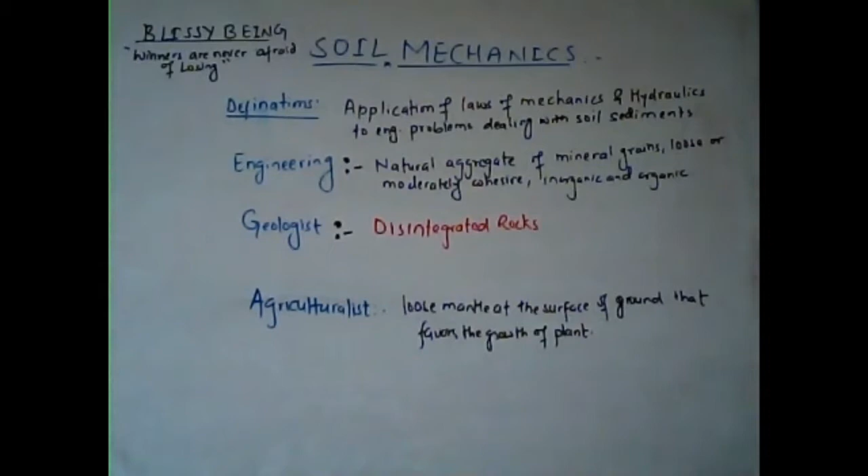This is the very basic and simple way you can classify soil. The mechanism in which soil is formed, the basic phenomenon in which the soil process takes place for its formation, is weathering.

At first, weathering takes place due to various agencies. The soil or rock is disintegrated due to weathering, and then the weathered soil is transported.

First weathering, then the weathered soil is transported and deposited at a certain place, and after deposition the soil is upheaved. Certain agencies change the to-and-fro movement of the soil, which is the upheaval. So for soil forming mechanisms, you have weathering, transportation, deposition, and upheaval. WTDU is the basic formation of soil.

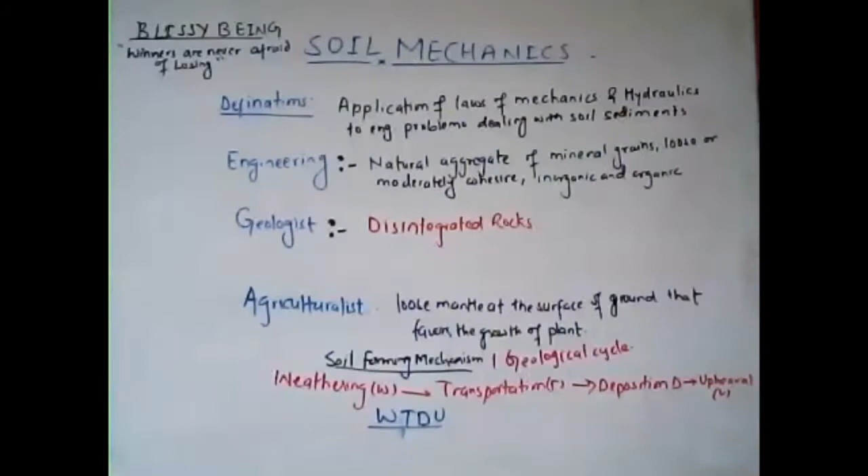Before moving forward into the three-phase diagram of soil, we need to know some basic terms that you may encounter in soil mechanics. First, soil transported by wind.

The soil transported by wind is aeolian soil; examples of aeolian soil are loess. And soil transported by running water is also alluvial soil.

Soil deposited at the bottom of a lake is lacustrine soil. Soil transported by gravitational force is colluvial soil, also known as talus.

Soil formed by glaciers or ice melting is glacier soil, also known as glacial drift. These terms may be useful for your competitive exams as well, so you must remember all these terms.

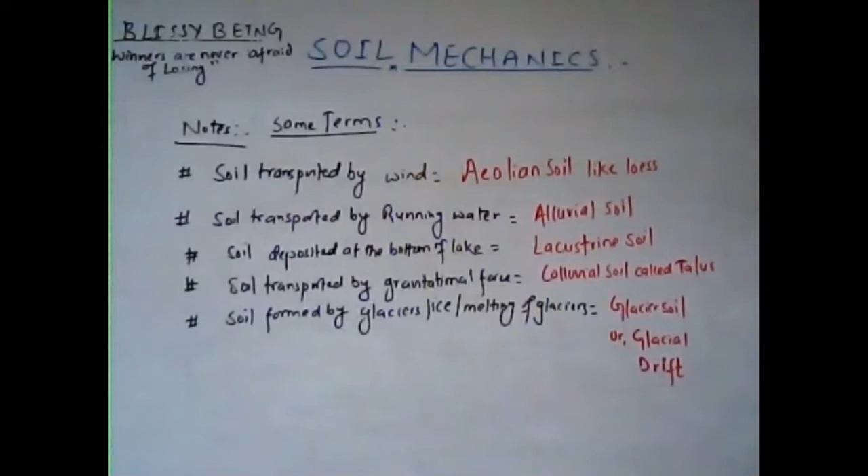Now friends, we will go through the different properties of fine-grained soil. Fine-grained soil possesses different properties like plasticity, thixotropy, consolidation, and swelling. These are the various properties of fine-grained soil.

We will briefly discuss what plasticity is. This topic will come in later lectures, in which we need to determine the plastic limit and liquid limit by the Atterberg limits or consistency limits.

For a quick overview, we are just mentioning all these things. Plasticity is the property of soil by which it undergoes deformation without cracking or fracturing. So soil just deforms without possessing any sorts of cracks or fractures.

In plasticity we have two limits, the plastic limit and liquid limit. Plastic limit is the minimum water content at which the soil will just begin to crumble when rolled into a thread approximately 3 mm in diameter. So when you roll the soil into a very thin thread, it just crumbles at that minimum amount of water, and that minimum water content is the plastic limit.

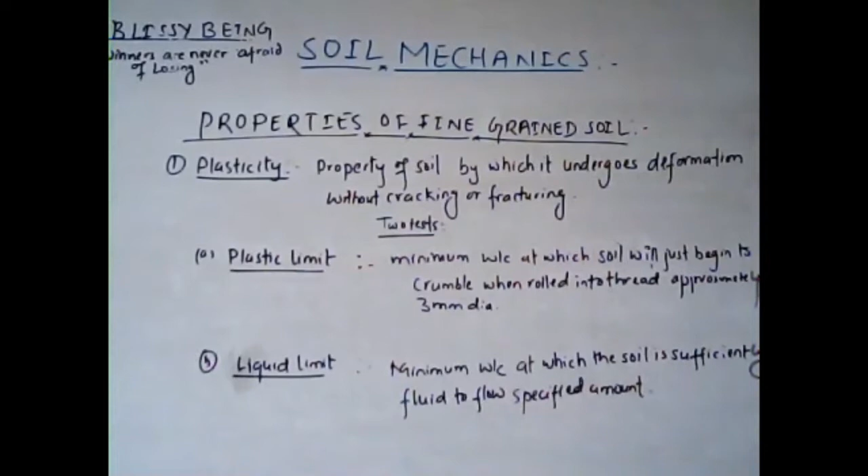Now friends, the second property of fine-grained soil is cohesion and thixotropy. Cohesion is the capacity of the soil for resisting shearing stress. Since shearing stresses occur in the soil, the resistance capacity developed by the soil against that is called cohesion.

Thixotropy: whenever sensitive clays are used in construction, they lose strength due to remolding during the construction operation. With the passage of time, the strength again increases, though not to the same original level. This strength loss or gain with no change in the volume or water content of the soil is called thixotropy.

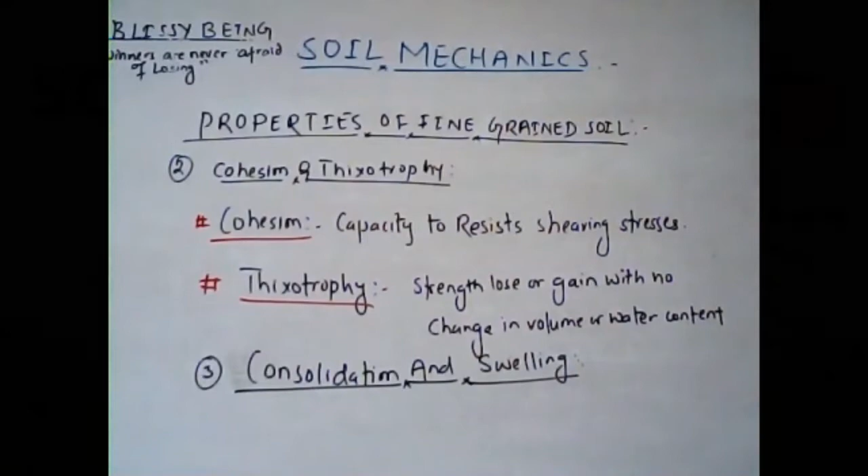The third property of fine-grained soil is consolidation and swelling. In consolidation, the volume of the soil is reduced, while in swelling, the volume of the soil is increased.

Now friends, we have moved to the three-phase system of soil. This is a very important topic of soil mechanics, and these basic terms are used throughout the entire syllabus. If you carefully understand these terms, the entire soil mechanics subject will become much easier for you. Soil consists of three phases: the solid phase, the water phase, and the air phase.

We have represented on the right-hand side the solid phase, water phase, and air phase. On the left-hand side is the volume section, where the volume of solid is Vs, the volume of water is Vw, and the volume of air is Va. If you sum the volume of air and water, you get the volume of voids, Vv. Adding all three volumes gives the total volume of soil.

Now we will be focusing on the various relationships between the different parameters associated with soil mechanics.

Now we will go through the technical terms used in soil mechanics, and first we will discuss water content, W. This water content is the amount of water present in a certain weight of solid.

Mathematically, water content is denoted by weight of water Ww divided by weight of solid Ws, into 100%. From the phase diagram, weight of water can be written as total weight minus Ws. So solving this, water content W equals W by Ws minus 1, into 100%. In terms of mass, you can write this expression as well.

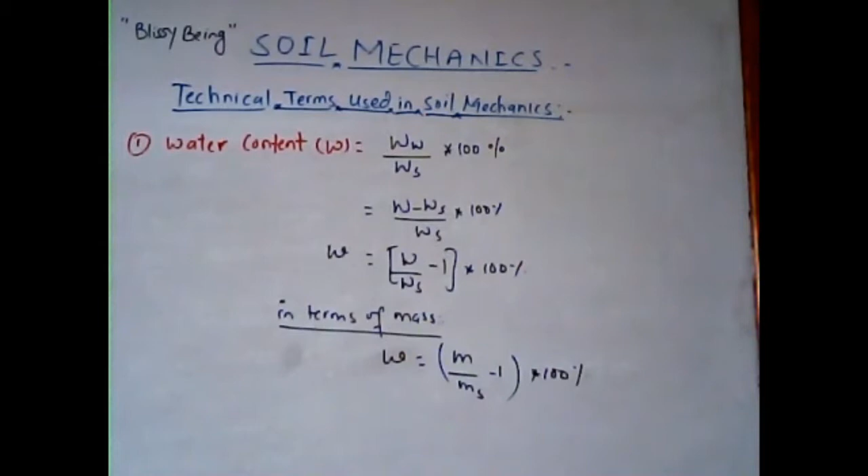Now, second technical term is the density of soil. The soil cannot remain in the same condition in all places. Sometimes it may be moist, sometimes dry, sometimes solid, sometimes saturated, and sometimes submerged, meaning entirely covered with water. In such cases, we have different densities.

The first type of density of soil is the bulk density or moist density. It is denoted by rho, and is the ratio of total mass of soil to the total volume of the soil. Its unit is kg per cubic meter.

The dry density rho d is the mass of solid to the total volume of soil. The density of solid, rho s, is the mass of solid divided by the volume of solid, that is, ms by Vs.

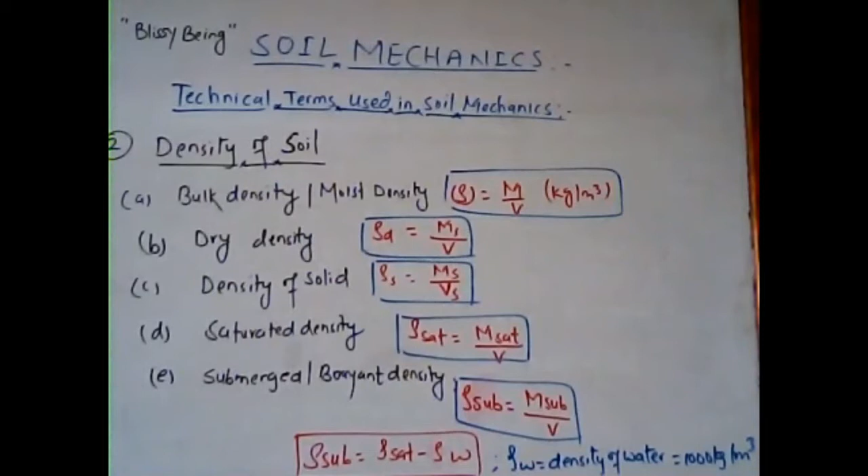Now, the third technical term used frequently in soil mechanics is the unit weight of soil mass. If you replace mass with weight in the density expressions, the resulting quantity is known as the unit weight.

The unit weight of soil also has different terms based on soil condition. First is the bulk unit weight or moist unit weight, gamma, which is the weight of soil to the volume of soil.

Second is the dry unit weight, gamma d, equal to the weight of solid to the volume of soil. Third is the unit weight of solid, which is the weight of solid by the volume of the solid.

Fourth is the saturated unit weight, gamma sat, the ratio of weight of saturated soil to the total volume of soil. Fifth is the submerged unit weight, gamma submerged, equal to the weight of submerged soil to the total volume of soil. The submerged unit weight can also be expressed as the unit weight of saturated soil minus the unit weight of water.

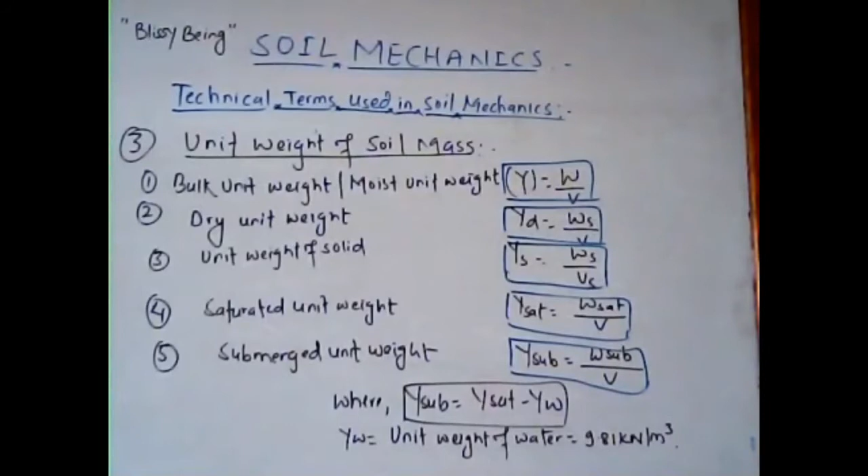Gamma w is the unit weight of water, taken as 9.81 kilonewton per cubic meter. These are very important technical terms used in soil mechanics, and understanding them will make it much easier to read the other chapters.

The fourth technical term is the specific gravity of the soil solids, G. It is the ratio of the unit weight of soil solids to the unit weight of water. If you know the specific gravity of any soil solid, you can easily find out the unit weight of that soil solid by multiplying the specific gravity with the unit weight of water, which is already known as 9.81 kilonewton per cubic meter.

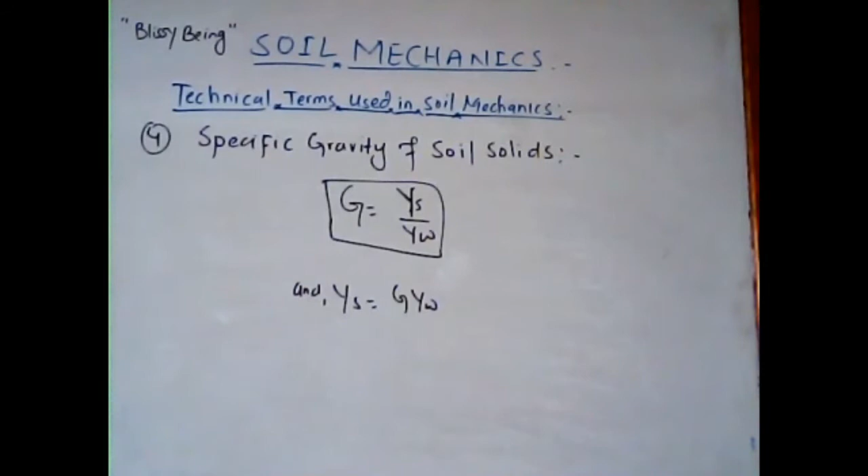The specific gravity of soil solid is the ratio of unit weight of soil solid by the unit weight of water. Now the fifth technical term used in soil mechanics is the void ratio, E. This void ratio is the ratio of the volume of void to the volume of solid - how much volume of void is present in the volume of solid is the void ratio, represented by E.

The sixth technical term is porosity, eta, that is the ratio of volume of void to the total volume. I have seen that many students get confused with these formulas - sometimes we use volume of void, sometimes volume of solid, sometimes total volume V. There is always confusion among students about which formula to use. If you remember the void ratio trick, you will always remember porosity. Always remember void ratio as volume of void to the volume of solid. For short remembering, you can use the 'VS Niketan' formula.

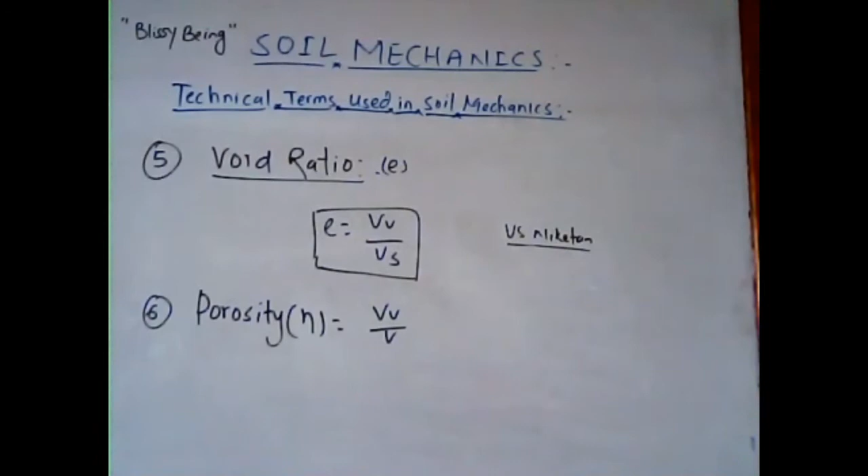V is the void, S is the solid. So in the void ratio, you have volume of void to the volume of solid. Now the seventh technical term is the degree of saturation, S. This degree of saturation is the ratio of volume of water to the volume of void - how much water is present in the volume of void.

Always remember that saturation is a word always related with water, so in the saturation formula there will always be the volume of water, because for saturation there needs to be water filled in the soil. Degree of saturation S is what volume of water is present in a certain volume of void. For fully saturated soil, all void is replaced with water - if you substitute the volume of void with the volume of water, VW, you get the degree of saturation S equals 1.

Likewise, for dry soil, the degree of saturation will be 0 because the volume of water in the dry soil case will be 0, and consequently the degree of saturation will be 0 for dry soil. This may sometimes be asked in your competitive exams.

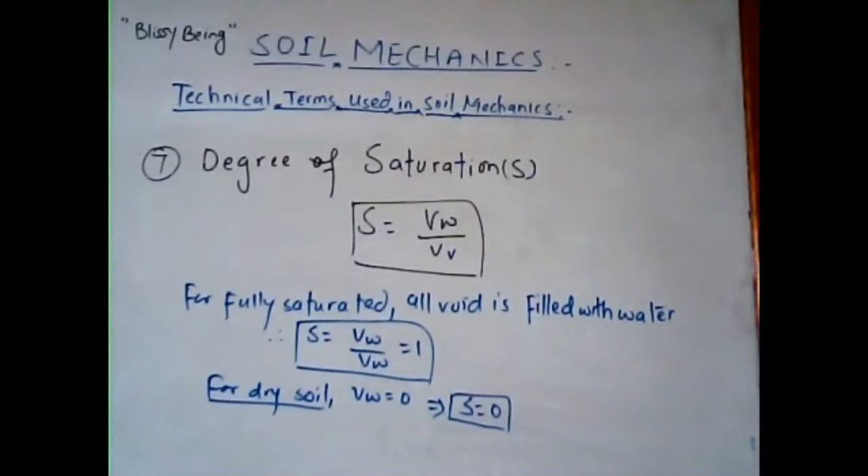Now the eighth technical term is the percentage air void, eta A. Eta A is the ratio of the volume of air to the total volume of soil, into 100%, which gives the percentage air void. Likewise, the next technical term is the air content, AC, which is the ratio of the volume of air to the volume of void.

Sometimes there may be confusion between these two formulas. Among these two formulas, we need to remember one so that we can remember the other automatically. If you try to learn both formulas separately, there is a chance you may mix them up. So you need to remember one formula and relate it to the other so you can easily correlate the difference between them.

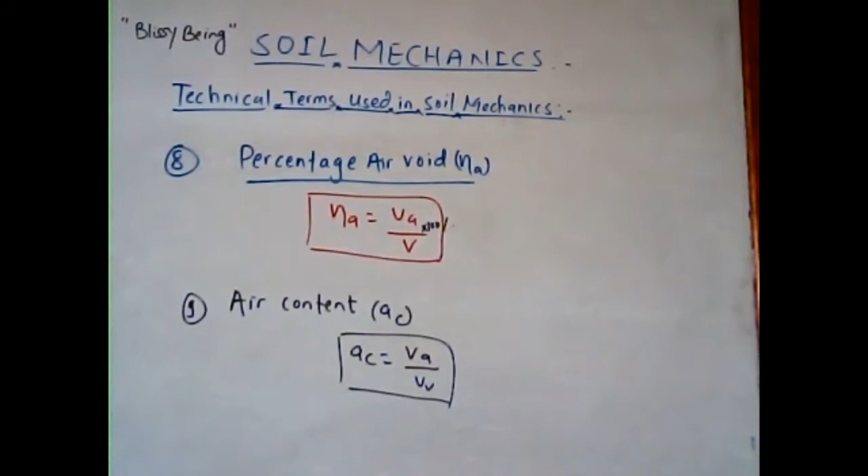Now friends, we can relate the air content with the degree of saturation. We know that the volume of void Vv equals to Va plus Vw, so Va will be Vv minus Vw. If you substitute the value of Va as Vv minus Vw, then you can easily obtain air content as 1 minus S. This is the important expression in which the air content AC is related with the degree of saturation. So whenever you have given the air content, you can easily convert it into the degree of saturation.

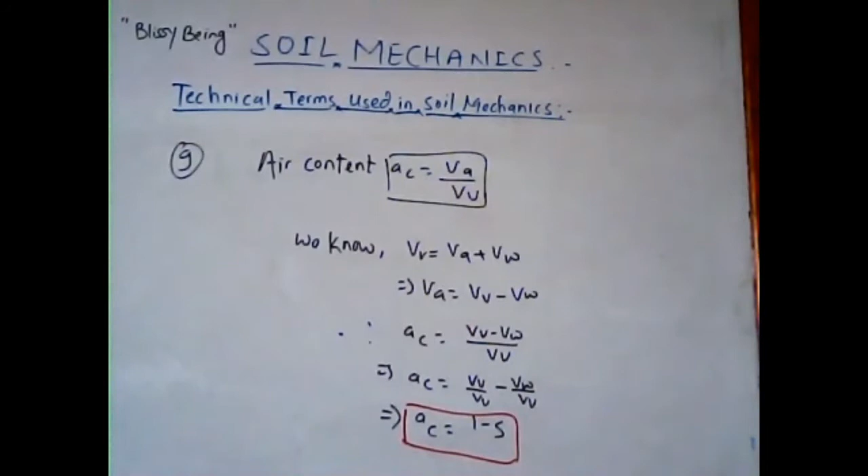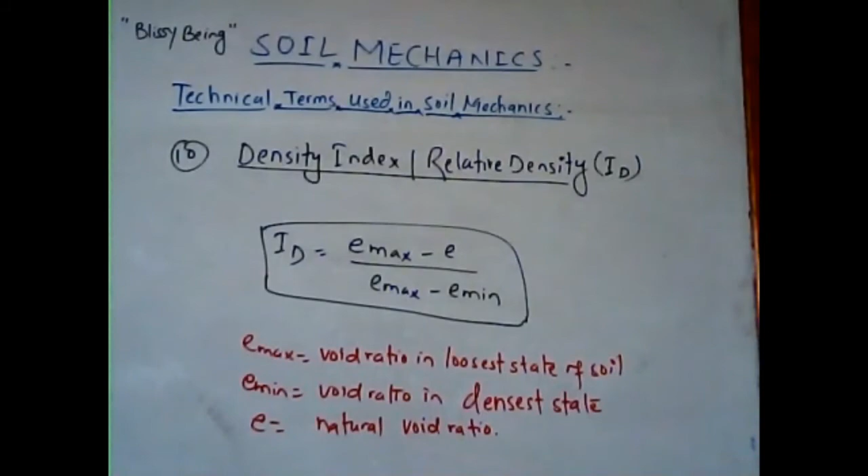Now friends, the final technical term you have to know is the density index, or the relative density, or the degree of density, ID. This ID is given by the expression ID equals to the void ratio in the loosest state minus the natural void ratio, divided by the void ratio in the loosest state minus the void ratio in the densest state. That can be abbreviated as ID equals to Emax minus E divided by Emax minus Emin. This Emax is the void ratio in the loosest state. When the soil is in the loose state, the void ratio will be more, because when it is in the loosest state, there is more amount of void, so the void ratio will automatically increase. Emin is the void ratio in the densest state, and E is the natural void ratio that will be given. If you know the maximum and minimum void ratio, then you can find the density index of the soil, or relative density, or degree of density, whatever name may be. Its value ranges from 0 to unity.

Now friends, we will be going through the important relationships between the various parameters that we have already studied previously. These relations are very much vital for your soil mechanics course.

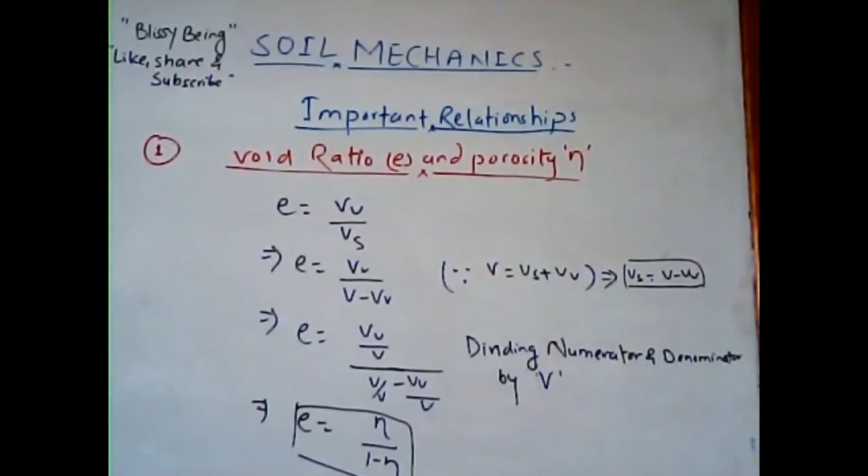First we will go through the relationship between the void ratio E and the porosity eta. To determine this relationship, we need to know the formula for void ratio and porosity. We know the formula of void ratio E as the volume of void to the volume of solid. Here we replace the volume of solid Vs as the total volume minus volume of void, and then divide the numerator and denominator by the total volume of soil. Then we can easily obtain the void ratio E as eta over 1 minus eta, that is void ratio equals to porosity over 1 minus porosity, which is the relation between void ratio and porosity.

Likewise friends, we can convert the porosity in terms of the void ratio. For that we have to know the formula for porosity, eta equals to Vv by V. You can replace the total volume of soil as the volume of solid plus the volume of void, and if you divide the numerator and denominator by the volume of solid, then you can easily obtain the porosity eta equals to E divided by 1 plus E. So this is the relation between these two terms.

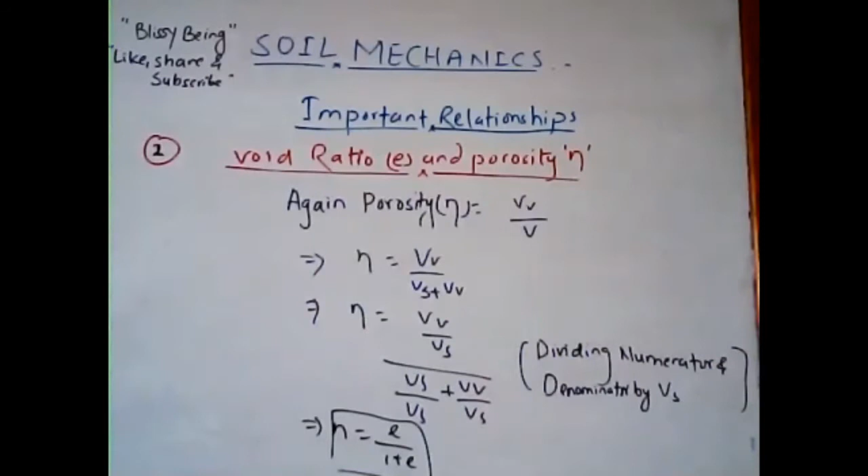Now friends, the third important relationship is between the void ratio, degree of saturation, the water content, and the specific gravity. This is a very vital relationship between these four terms.

So the derivation of this is that we need to start from the water content. We know that the water content is the ratio of the weight of water to the weight of the solids. So if you convert the weight in terms of unit weight and volume...

We get WW as gamma W into VW, since weight is given as gamma into V. Substitute WW as gamma W into VW, divided by WS as gamma S into VS. We know that the unit weight of water and the unit weight of solid has a specific relation: the specific gravity is the unit weight of solid divided by the unit weight of water. So here the relation is just opposite, giving gamma W by gamma S as 1 by G into VW by VS.

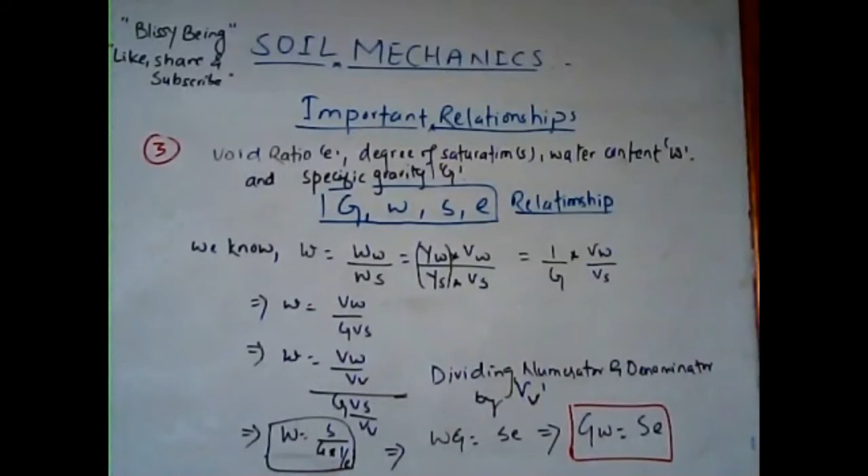We have obtained the relationship between W and G, and we need to add two more parameters, the degree of saturation and the void ratio. We need to combine the degree of saturation and void ratio into one expression, so we divide the numerator and denominator by whatever figure we require. We know the degree of saturation is given by the volume of water to the volume of void, so we divide numerator and denominator by the volume of void VV, and we can obtain the relation between GW and SE. So the final relation is GW equals SE, that is specific gravity into water content equals degree of saturation into void ratio.

Now the fourth relationship is between the dry unit density gamma D, the bulk unit density gamma, and the water content W. This is also one of the important expressions. For the derivation, we need the water content formula as the weight of water to the weight of solid.

For this derivation, we add 1 on both sides of the expression: water content plus 1 equals weight of water divided by weight of solid, plus 1. The weight of water plus weight of solid can be represented as the total weight of the soil, capital W. So water content plus 1 equals capital W by weight of solid. Cross multiplying, we obtain the weight of solid WS equals the total weight of the soil W divided by water content plus 1.

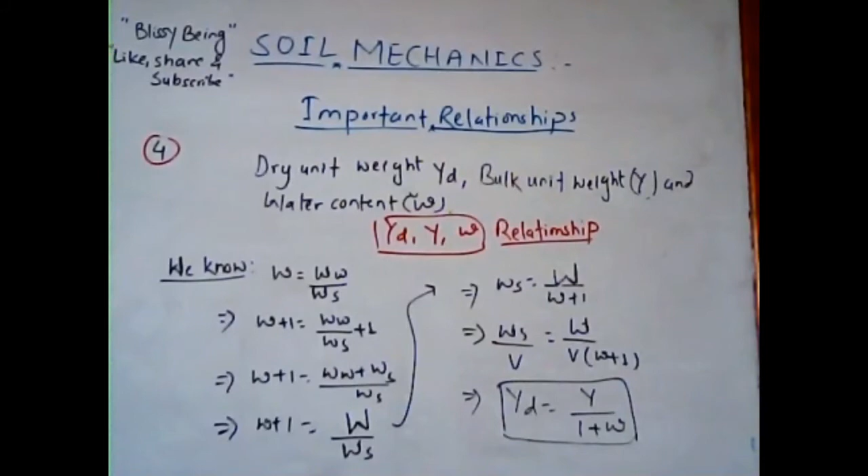If we divide both sides by the total volume of the soil V, we obtain gamma D equals gamma divided by 1 plus W. Here WS by V, the weight of solid by the total volume of soil, is the dry unit density. So we obtain the dry unit weight gamma D equals the bulk unit weight gamma divided by 1 plus water content, which is the required expression.

Now the fifth relationship is between the dry unit weight gamma D, the specific gravity G, and the void ratio E. We derive this knowing the dry unit weight gamma D is given as the weight of solid by the total volume of soil. So gamma D equals weight WS, which can be written as gamma S into VS divided by total volume. We know from specific gravity that gamma S equals G into gamma W, so we substitute gamma S as G into gamma W into VS by V.

Now we replace the total volume of the soil V as VS plus VV, since total volume is the volume of solid plus the volume of void. We divide the numerator and denominator by the volume of solid and obtain gamma D equals G gamma W divided by 1 plus E. This is the required expression, the relation between dry unit weight, specific gravity, and void ratio. Similarly, we can relate dry unit weight gamma D and specific gravity with the porosity.

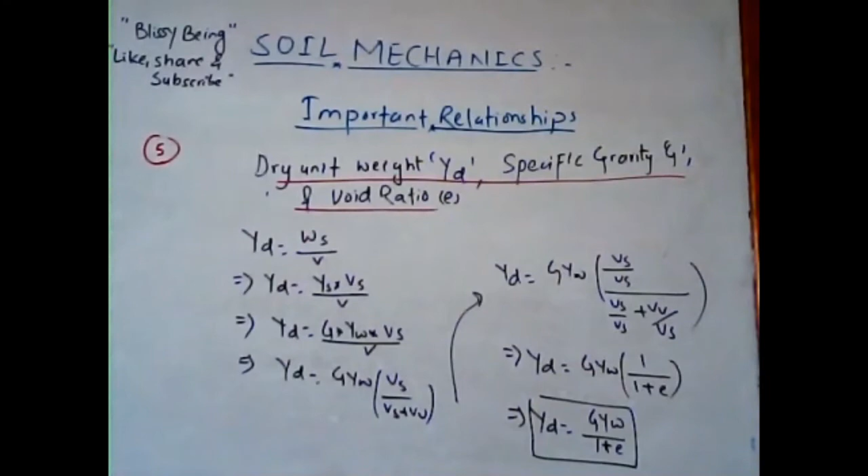Now we will see about porosity. Likewise, we convert the relationship between the dry unit weight, the specific gravity, and the porosity eta. We start from the dry unit weight gamma D equals gamma, weight of solid by the volume of soil. Substituting similarly as in the previous expression, we easily find gamma D equals G gamma W into 1 minus eta.

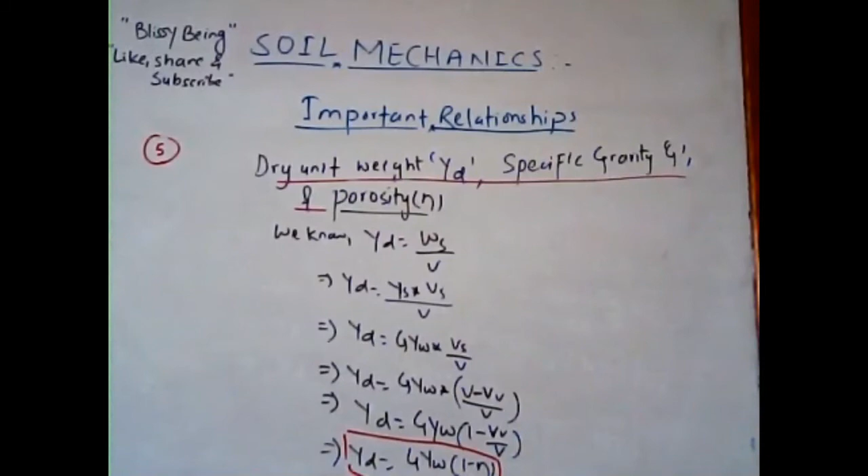Now friends, a very important relation is the relation between the saturated unit weight and the specific gravity and the void ratio. So gamma sat, G and e relationship we will be deriving now.

For this derivation, we have to know the formula for the saturated unit weight of the soil. Gamma sat is given by W sat divided by the total volume of the soil. W sat can be substituted as weight of solid plus weight of void divided by the total volume. The weight of void can be written as weight of water plus weight of air. Weight of air is 0, so we can write WV as WW. So gamma sat will come out to be WS plus WW by V.

So we change the weight into terms of unit weight and volume. WS plus WW by V will be converted into gamma S into VS plus gamma W into VV by total volume. Here we have just substituted the volume of water as the volume of void. Now if you solve this, we will receive gamma sat equals to gamma W times G plus e, divided by (1 plus e). Friends, this is the simple expression, the relation between gamma saturated, specific gravity and the void ratio.

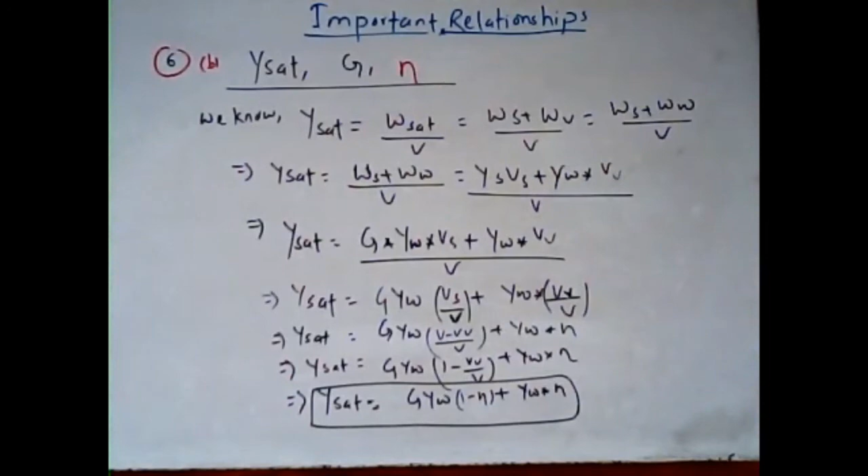Likewise, friends, we will solve this expression in terms of porosity, and derive the expression between gamma sat, G and the porosity. For that, we continue from the previous expression, gamma sat equals to G gamma W into Vs plus gamma W into Vv by total V. Now we convert everything in terms of porosity, so we convert the volume of solid Vs as the total volume minus volume of void. If you solve this, we receive gamma sat equals to G gamma W (1 minus eta) plus gamma W into eta. So this is the required expression between gamma sat, G and the porosity.

Now friends, the seventh and last relationship is between the submerged unit weight gamma sub, the specific gravity and the void ratio. We know that the submerged unit weight is given as the saturated unit weight minus the unit weight of water. We previously derived gamma saturated as gamma W times (G plus e) divided by (1 plus e), this is the formula of saturated unit weight. If you substitute this saturated unit weight in gamma submerged equals to gamma sat minus gamma W, then you can obtain the submerged unit weight as gamma W (G minus 1) divided by (1 plus e), which is the required expression.

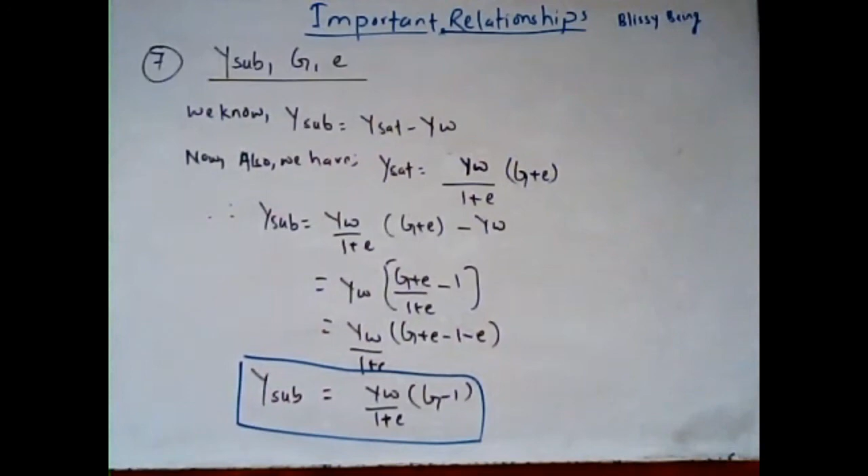Okay, now friends, we will list out all the required formulas that we have studied and derived till now. These important formulas will be very, very essential for you while going through the subsequent chapters of soil mechanics. First formula is the relation between the void ratio and the porosity, e equals to eta divided by (1 minus eta). Secondly, the relation between porosity and void ratio, eta equals to e divided by (1 plus e).

Likewise, the relation between specific gravity, water content, degree of saturation and void ratio: G times W equals to S times e. Fourth is the relationship between dry unit density and the unit weight of the soil, gamma D equals to gamma divided by (1 plus water content). Fifth is the relation between dry unit density, specific gravity G and the void ratio: gamma D equals to G gamma W divided by (1 plus e). Converting it into the form of porosity, gamma D equals to G gamma W (1 minus eta).

Likewise, gamma saturated will be given as gamma W (1 plus e) times (G plus e), divided by (1 plus e). And in terms of eta, gamma saturated equals G gamma W (1 minus eta) plus gamma W into eta. Likewise, at last we studied the gamma submerged or buoyant unit weight equals to gamma W (1 plus e) times (G minus 1). So these are the required expressions that we have studied, and they will be very, very useful for you.